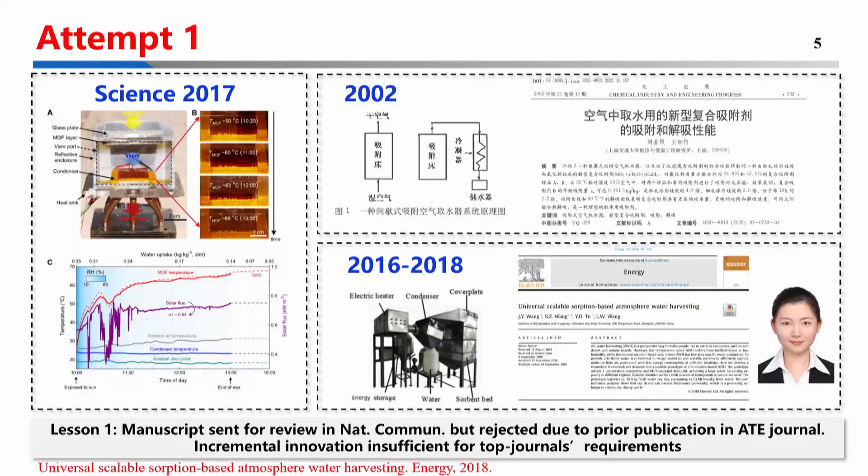At that time, we had a publication in China. But then later, a student, Jiayun Wang - she is here, now an associate professor - when she was a PhD student, she did the research work, and when the Science paper was published.

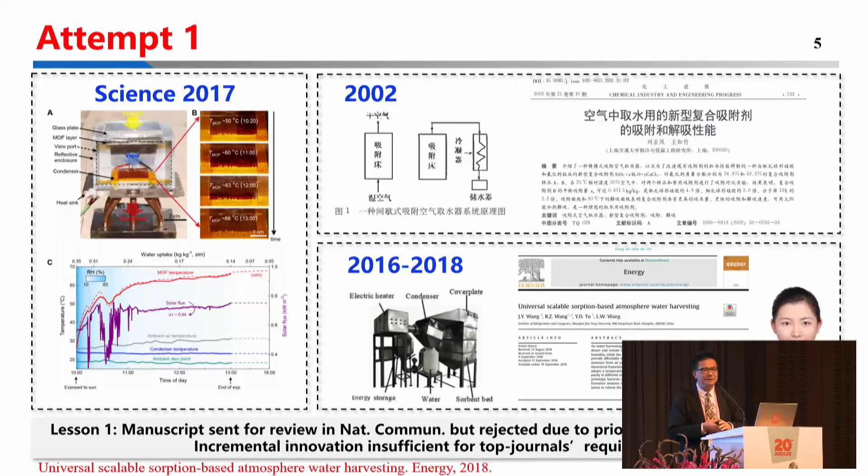At that time, in our laboratory, we had built a machine to get atmospheric water harvesting every day, 50 liters. This made our group think: why does 1 gram of water from MOF materials in a very dry area get published in Science, but we get 50 liters of water and can only publish in Applied Thermal Engineering or Energy? So we made some considerations.

Some years ago, we also had research work on air conditioning, whether it's possible to get latent heat and sensible heat separated. We created technology using desiccant materials coated on heat exchangers, using desiccant to absorb moisture for dehumidification. In this case, for air conditioning, electric drive is used for cooling, but dehumidification was done by the desiccant materials.

But with desiccant material, you need to consider regeneration - we used the condensing heat for regeneration. In this case, we could get the normal COP value for air conditioning increased by 100%. This had a great impact, but at that time, we were just beginning to try to seek the possibility to publish in high-impact journals. At that time, we had no experience.

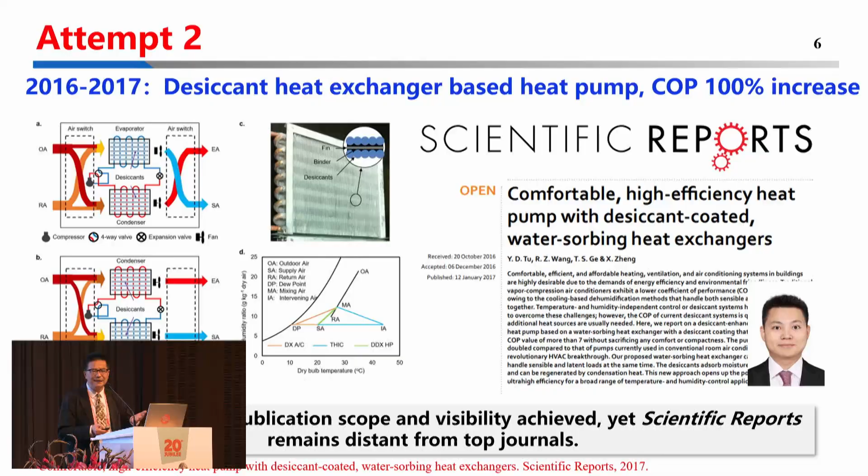We submitted to Nature, then transferred to Nature Communications, and finally to Scientific Reports. My student told me, Professor Wang, Scientific Reports is also a part of Nature. So in this case, I finally accepted, we submitted and went through the peer review process, and at last we paid $3,000 for the payment. This is an open access journal. It's actually a very good publication, but unfortunately, although we had very good results, it's not a high-ranking journal. But we had another attempt.

Due to this experience, when a cell-based journal called Joule was launched, in its second year, because of the impact of atmospheric water harvesting in the world, I contacted the editor-in-chief of this journal, Philip Earis, about whether they would be interested if we contributed a review article. My proposal was accepted by them, and then three students worked with me to prepare the review paper for Joule. It was published in August 2018. This was the first time I felt we had contact with a high-impact journal.

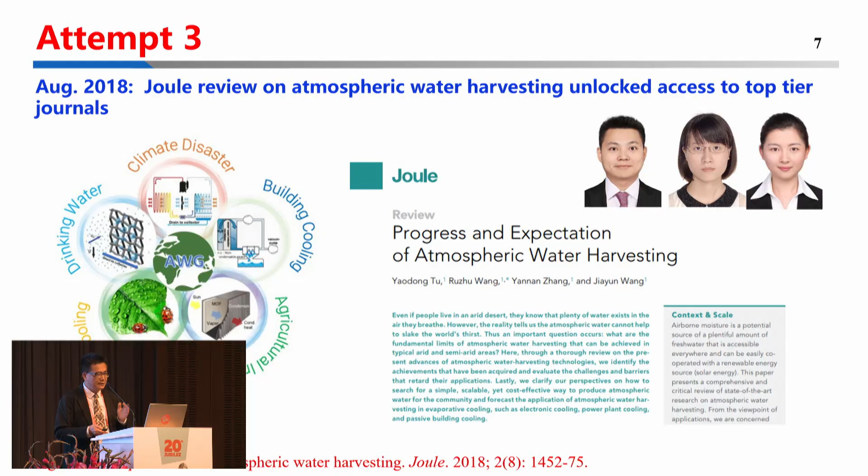At that time, the impact factor wasn't ready yet, but I thought this was a good journal. This helped our research and also encouraged our students. This is why I wanted to found a so-called innovative team on energy, water, and air, because our team works with solar energy, air conditioning and heat pumps, and also desalination. Energy, water, and air are the main criteria of my research group.

At that time, I set the goal that every year our small group needed to publish 3 to 5 high-impact journal papers, minimum Nature Communications level or even higher. So we started the exploration, trying to explore ground-breaking basic research from 0 to 1. The first success was research published in 2019, also in Joule - our first completed research paper. Really, it took us 2 years.

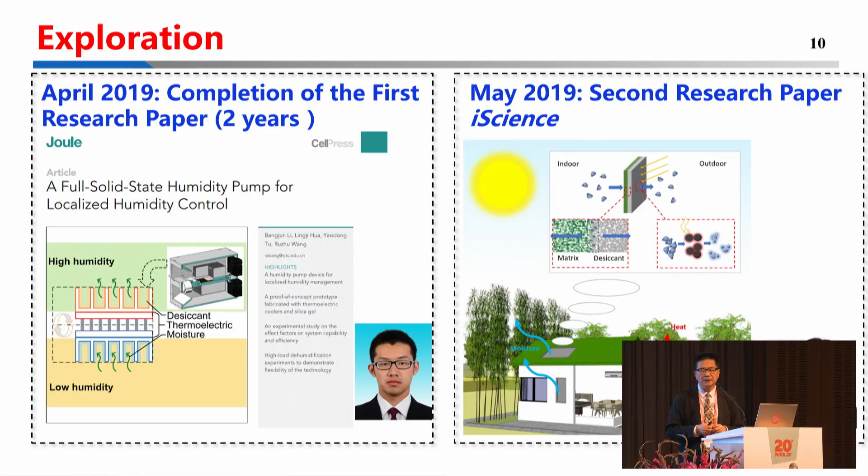Meanwhile, we had a second research paper, because at that time another new journal called iScience was launched. We published another paper on solar-generated dehumidification, where we took humidity from inside and moved it outside through an absorption panel. Outside, we had a selective coating to absorb solar energy and release the humidity - again, a kind of humidity pump concept.

There is also a very important conference, the ASME International Conference of Micro Nanoscale Heat and Mass Transfer. The conference organizer invited me several times to deliver a keynote lecture, but originally I never participated in this kind of conference because I think I'm not doing nanoscale work. I'm doing scale-up systems.

But after half a year, they contacted me again. They said, Professor Wang, you are doing adsorption refrigeration, you are using adsorbents, and adsorbents should be nanoscale. Why not? If we need somebody to say this, who will be most suitable? So finally, I thought if you want me to say something about adsorption refrigeration, that's my research area. I agreed, but for the conference topic, I set it as adsorbents relative to energy, water, and air.

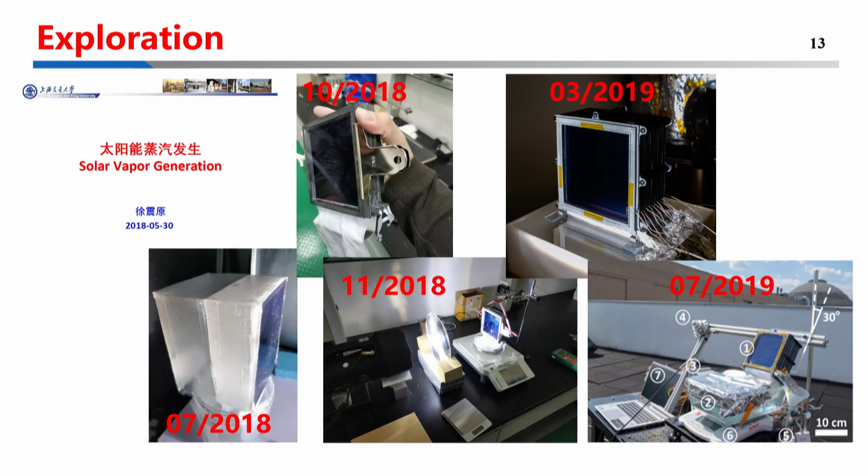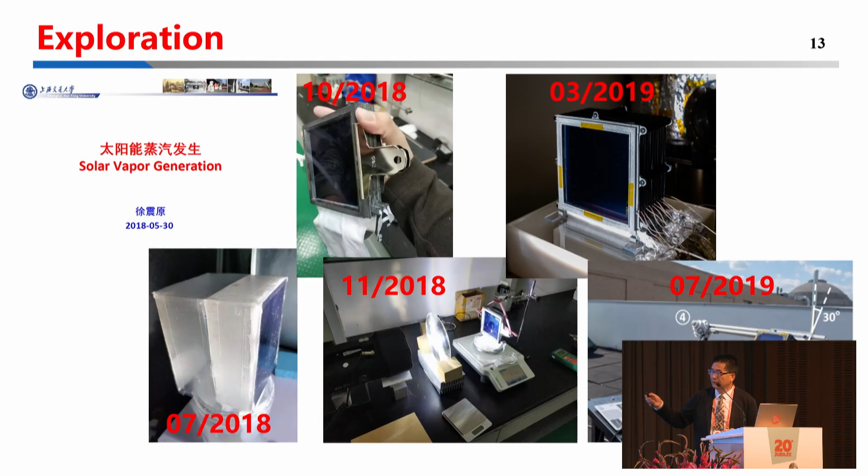This is also for desalination. Professor Xu Zhenyuan, at that time a young faculty member, is also here today. We developed a lot of research work on solar desalination. Starting from 2018, and finally in 2019 after one year, everything finished, and we sent our facility to MIT, because we had some collaboration to be tested there. This helped us because this research is more well respected since it's from MIT. We collaborated with MIT, and finally got good publications in Energy and Environmental Science.

Meanwhile, we tried some research for breakthroughs in advanced materials. We did research work on PCM materials for thermal storage. In this case, thermal conductivity is very critical, so there are a lot of researches for enhancement of thermal conductivity of PCM materials, such as nanofibers and so on. But for us, if we consider building scale-up systems, we must use engineering materials.

In this case, we tried expanded graphite, because expanded graphite could be made into a plate and also scaled up. We could integrate this with PCM materials and then form it into a fixed form. In this case, we could increase the thermal conductivity nearly 70 times compared with PCM.

Finally, this paper was published in Advanced Materials. We collaborated with the second last author, a very famous professor at Shanghai Jiaotong from the School of Materials. He instructed us a lot on how to get a publication in material science. This is actually a very good story.

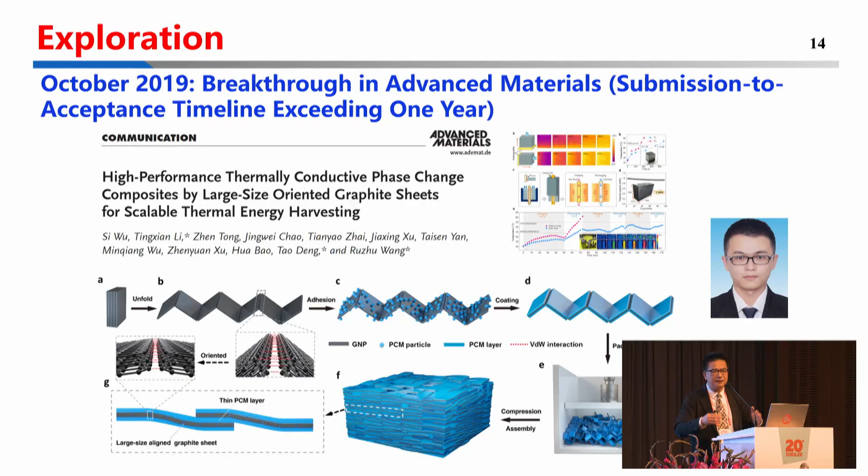We succeeded with Joule and with Advanced Materials, and this made the whole group, especially the young students, inspired. The inspiration is very, very important. When this happened, I saw that before 8 o'clock, when I arrived at my laboratory, students were already doing experiments. This just made the whole research group very inspired and active.

Then, in the spring of 2020, we had publications: another one in Joule, and Energy Storage Materials, then in February, Energy and Environmental Science and Angewandte Chemie, then in March, Energy Storage Materials, and later ACS Materials. These were several papers from students. At that time, on Shanghai Jiaotong University's homepage, there were 5 papers listed, and 4 of them were from our research group.

Due to COVID-19, scientists were nearly isolated, but at that time in China we were free to move. In the United States, however, it was not possible for scientists to come to the laboratory. But MIT organized an international curriculum on thermal innovations, suggested by Professor Gang Chen and also Professor Evelyn Wang at MIT, the department head of mechanical engineering. Professor Evelyn Wang called me and told me we needed a specific topic for water harvesting, and asked who should be the lead candidate to organize this kind of workshop. I suggested this group, and then we broadcast online for this kind of seminar. MIT made the promotion for all speakers.

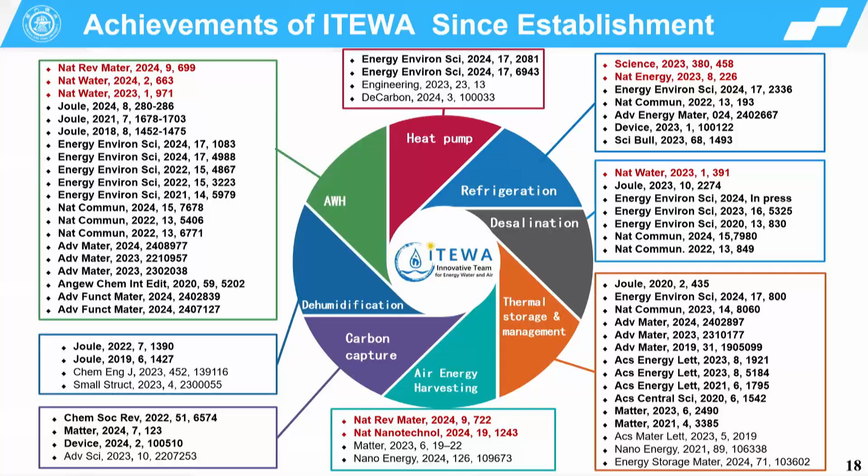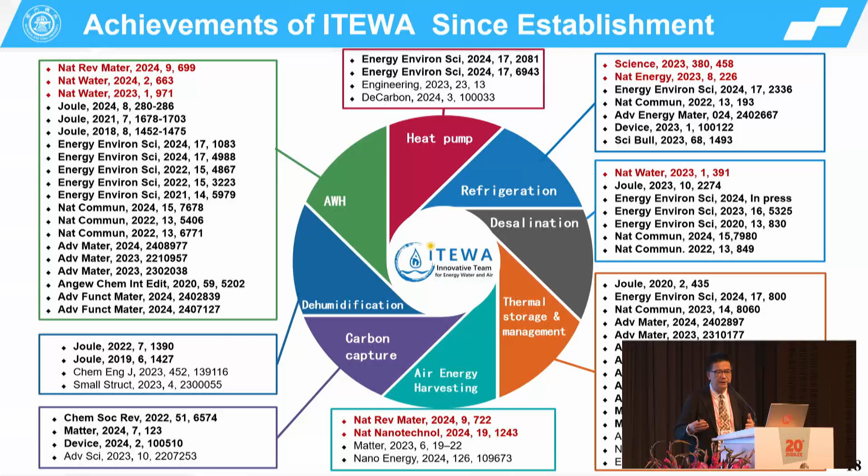After several years, by the end of 2024, we had all these publications—something we originally couldn't imagine, because my target was 3 to 5 high-impact journals every year. Now we've had publications in Nature Reviews Materials, Nature Water, Joule, Energy Environment Science, Nature Communications, Advanced Materials, and so on. This represents the whole group—we have 4 faculty members and nearly 20 students involved, which has inspired a lot of new achievements for the whole research group.

Now let me talk about what we've done from 0 to 1 and 1 to 100. Our research focus for the team normally covers atmospheric water harvesting, thermal management for electronics, dehumidification and humidity control, energy storage, greenhouses for plants, heat pumps and energy storage, and desalination. I'll just give some examples, starting with atmospheric water harvesting.

At the start, we had publications in Applied Thermal Engineering, then again Applied Thermal Engineering, then Energy. We went through several steps, starting from materials like ACF, graphite, and silica gel. In 2015, we got 0.3 kilogram of water per day with solar energy. Then in 2016, 14.5 kilograms of water per day, and in 2017, 50 liters. We got a project to develop a unit producing more than 30 liters of water per day driven by solar energy—these are the steps we went through.

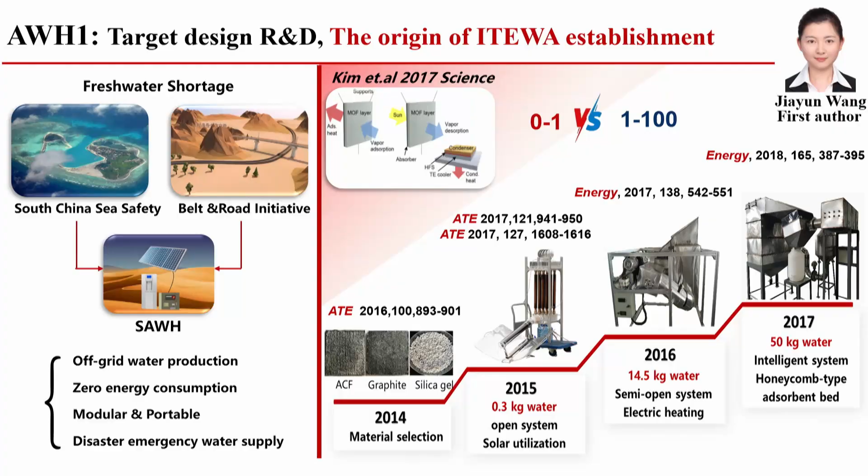We also did some research work with MOF materials, based upon experience from MIT, UC Berkeley, and other research groups. Even with MOF materials for absorbing water, there's a limited adsorption capacity because it's physical adsorption. So we also worked a lot with chemical adsorption, using lithium chloride and impregnating lithium chloride water into the micropores of the MOF materials. This improved the adsorption of moisture much compared to the regular ones.

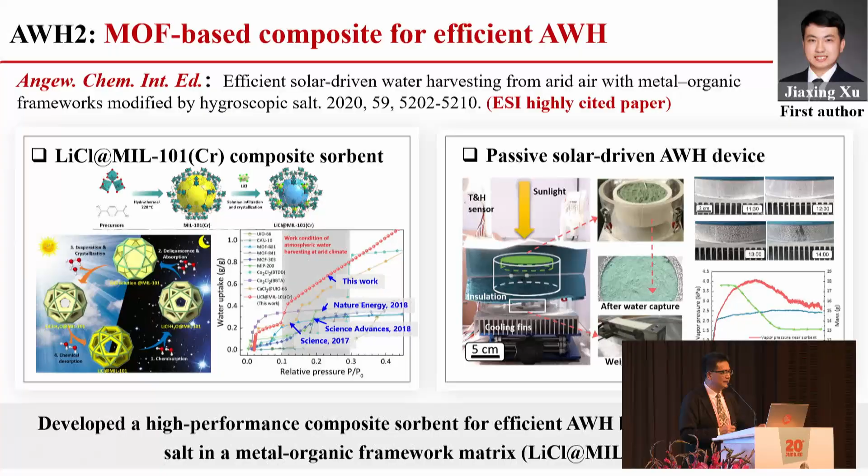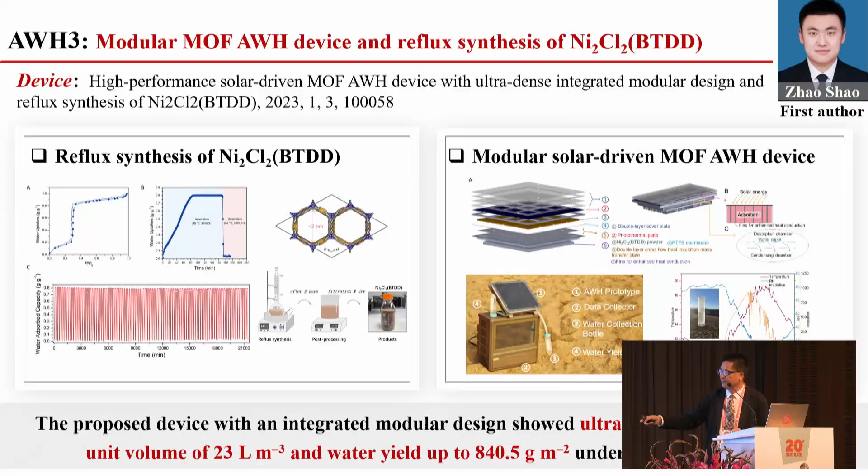Based on this, we developed a passive solar-driven atmospheric water harvesting system, which was published in Angewandte Chemie International Edition. We also used solar energy directly with a solar collector, integrating solar panels with a condenser on the backside. During the night we open it for adsorption, and during the day we seal and close it, letting solar radiation hit it so we could collect liquid water condensed from the condenser. With this, per square meter we could get nearly 800 grams of water, and the size is very compact.

Later we thought it could be possible to use solar energy for continuous daily operation, which requires an adsorbent with high-speed adsorption and high-speed regeneration. So we used lithium chloride on a nano-composite adsorbent, along with specific techniques to improve heat and mass transfer. In the end, we established solar-driven rapid cycling atmospheric water harvesting devices, able to operate about 8 cycles per day, making efficient use of solar energy. This results in about 2.3 liters of water per square meter per day.

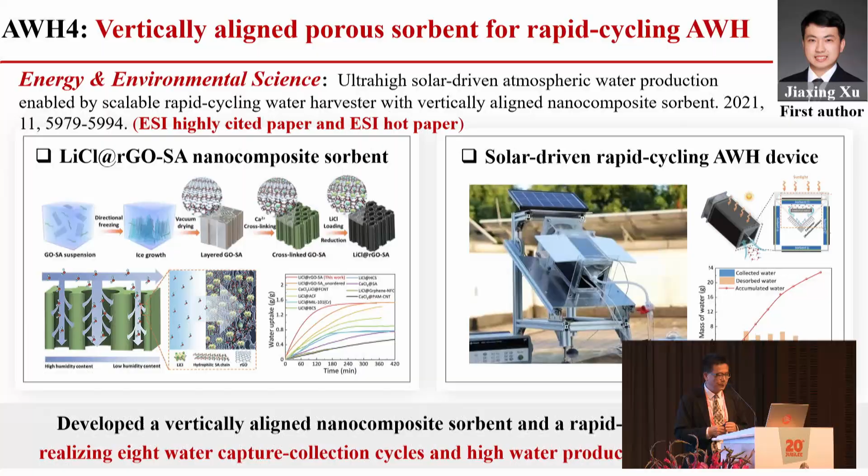Also, we tested another result in the same arid region in the desert area. What we found is that in that area, adsorption usually happens very slowly, so we put adsorption materials out at night to absorb moisture from the air, then used daytime for regeneration. But we need a very short time for regeneration.

So in this case, I suggest we get maybe 8 units of this kind of adsorbent. Then during the day, each unit could generate 8 times, so in this case we could get a much higher yield of atmospheric water harvesting.

This paper was published in Nature Communications. Later, I had visits from a company, and they wanted to commercialize it. Later I will show you — now we have a commercialization for atmospheric water harvesting.

Also, the students learned how to do this using MOF materials. We explored whether it's possible to make a rotation every day with 3 plates, making it continuous adsorption and desorption. This actually achieved about 2.11 liters of water per kilogram per day.

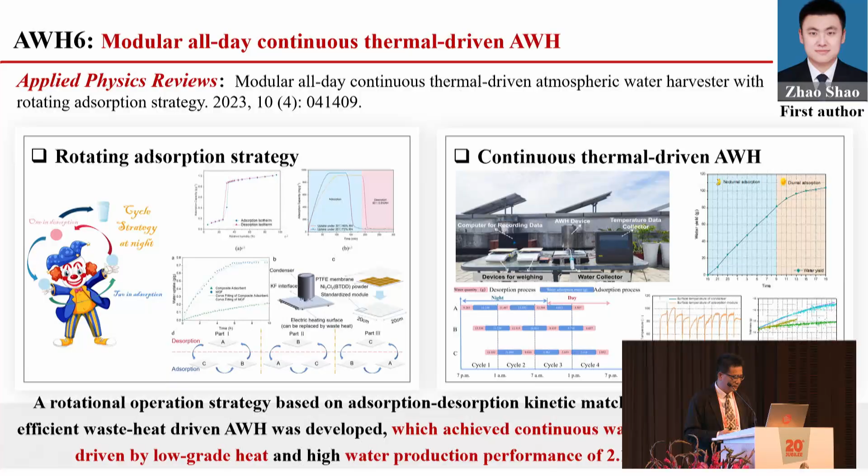We are also working with interconnected porous gel for high efficiency, continuous solar atmospheric water harvesting.

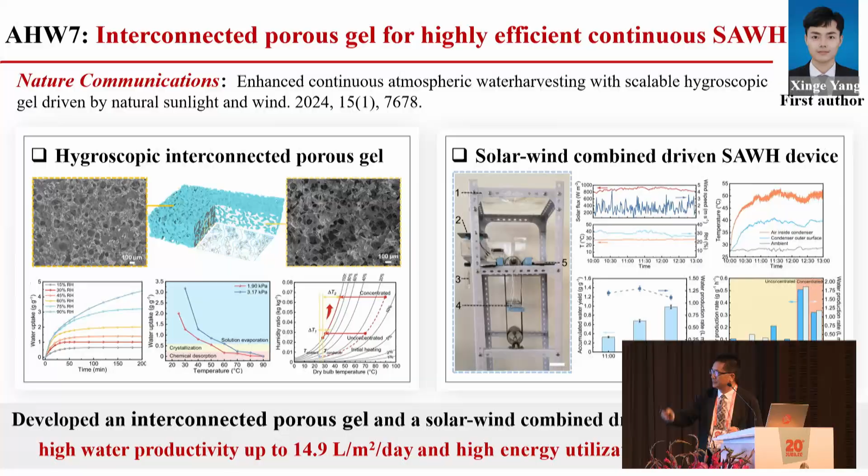This is a specific machine — we take the material and just rotate it. When it's outside, you get adsorption. But when it comes to the concentrated solar, you get regeneration, and in this case you get moisture condensed into water.

So in this case, what we achieved was nearly 15 liters of water per square meter per day. This is a very big increase, making this kind of technology market available and market interesting.

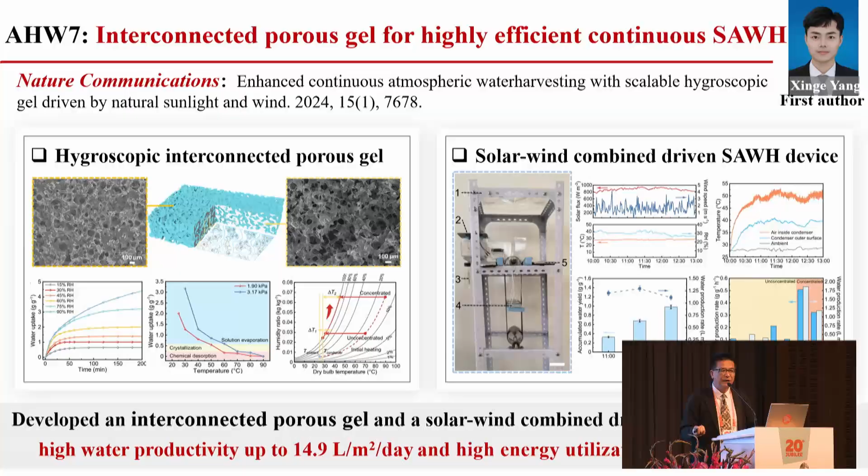The second topic for the research is electronic thermal control.

Some years ago, before I considered doing this, with this kind of MOF material I considered application for mobile phones. We used a near-standard mobile phone for testing. When the electronic working load is lower, if it's coated with MOF material, it could absorb moisture. But when the load goes higher and the temperature rises, the absorbed moisture is released, and in this case you reduce the temperature.

So this is a kind of what we call sweat cooling, because it's similar to how the human body cools through sweat. For the mobile phone case, we demonstrated that the maximum temperature could drop by nearly 8.6 degrees Celsius.

This verifies that it's very efficient, because for the adsorbent materials with moisture, the desorption heat is normally nearly 2,000 joules per gram — compared with PCM, nearly a 7 to 10 times increase. So in this case, using just about 1 gram, you get the electronics' temperature well controlled.

Students also practiced with battery thermal management, coating it with MOF material. Testing found that we could control the battery temperature below 45 degrees and realize self-preheating, increasing the battery capacity by 9.2%.

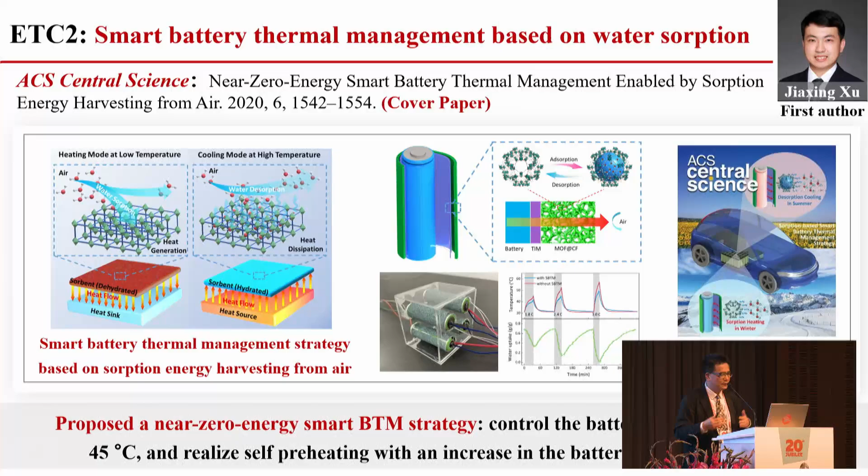So in the summer, it cools down, but in the winter it heats up by adsorption — cooling down happens by desorption. We tested such batteries and demonstrated that it keeps them always working in a safe temperature region.

Based upon this, we also tried — because my research group had very good collaboration with Huawei for 5G stations — originally we optimized our 5G stations, because going from 4G to 5G, Huawei wanted to keep the size unchanged. They asked us to optimize the heat exchanger. It was successful — nearly 10 million units used our structure. So we had a very good partnership with Huawei.

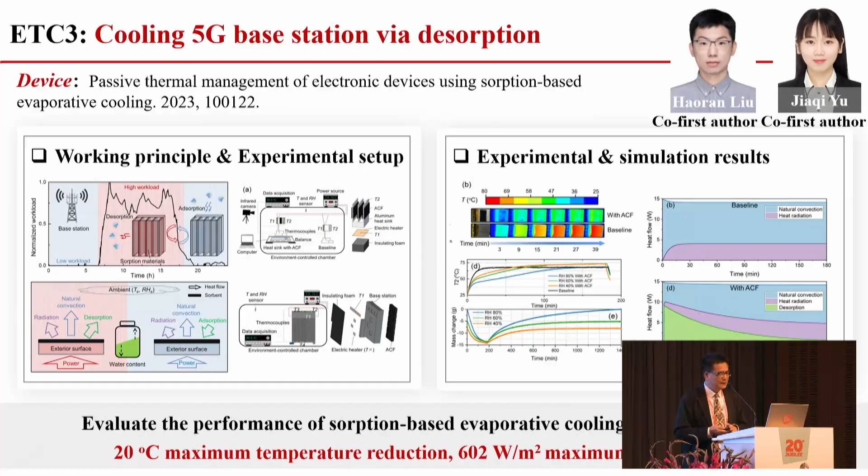So in this case, I am considering how to use this for 6G. I suggested using this kind of sweat cooling coated on the heat exchangers. What we found for the 5G station we tested was nearly 20 degrees maximum temperature reduction, with a cooling power of nearly 600 watts per square meter. This could be a very important development.

So finally, we had passive thermal management of electronic devices. This is just a review article published in Device, where we introduce how this could function. We consider its use for mobile phones, 5G stations, and any kind of batteries, including for battery charging and so on.

Very recently my students thought we could also do PV cooling, because of photovoltaics in China we have huge photovoltaic power stations, especially in the desert area. After long use there are a lot of dusts, but usually no water there, so they have a requirement to use water for cleaning. So in this case, we tried the possibility to use sweat cooling to cool down the PV photovoltaics.

In this case, you could increase the energy efficiency to generate electricity, but meanwhile we could produce water. So this is a concept for this research, an example of using future energy. This was published in Joule, and now we are doing the real one, cooling down photovoltaics while also producing water.

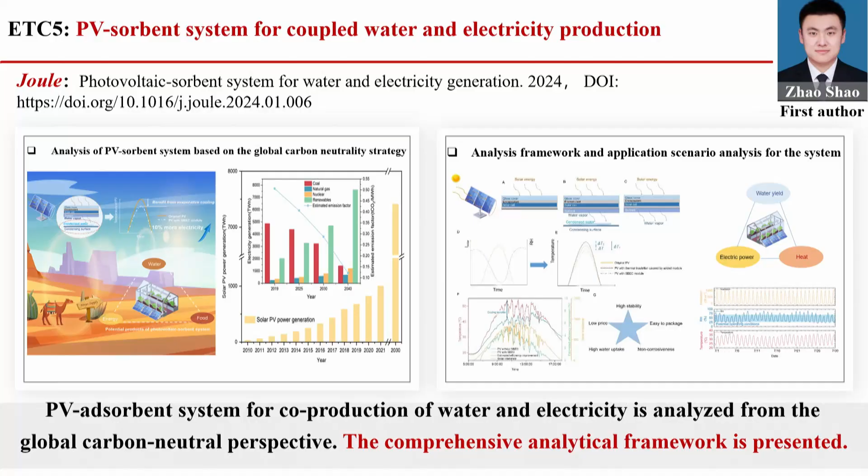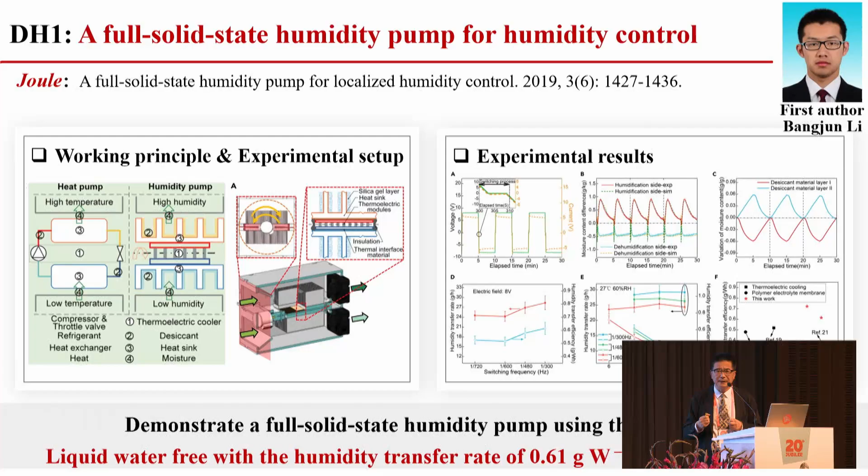So the third topic is dehumidification and humidity control. We started from this student, Bangjun. At that time he was a PhD student working on 5G mobile phone cooling for Huawei, but this topic was not related to his PhD work, he was just interested in it. Very fortunately, he got his first research publication in Joule.

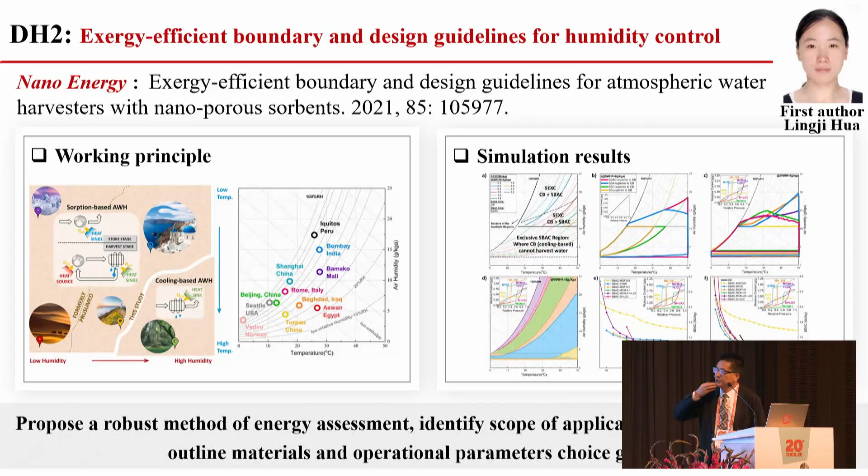Then another student, actually his wife—they were classmates and worked together, and she became his wife—worked on nano energy. We published one paper on exergy efficient boundary and design guidelines for atmospheric water harvesting. In this case we clarified, for AWH in different climate regions, what the boundary conditions are.

And also, this is a postdoctor, Primož Poredoš. I think some of you may know his father, Poredoš, from the Slovenia Energy Association, he was chairman actually. So he became my postdoctor, and while working with me he contributed one paper in Science, one paper in Joule, and also one paper in Energy & Environmental Science.

So this was the idea, so-called sustainable cooling with water generation. The editor liked the idea, asking if it's possible to have these dual uses in dry areas. So we proposed a good idea for how to achieve this in dry areas for cooling and also atmospheric water harvesting.

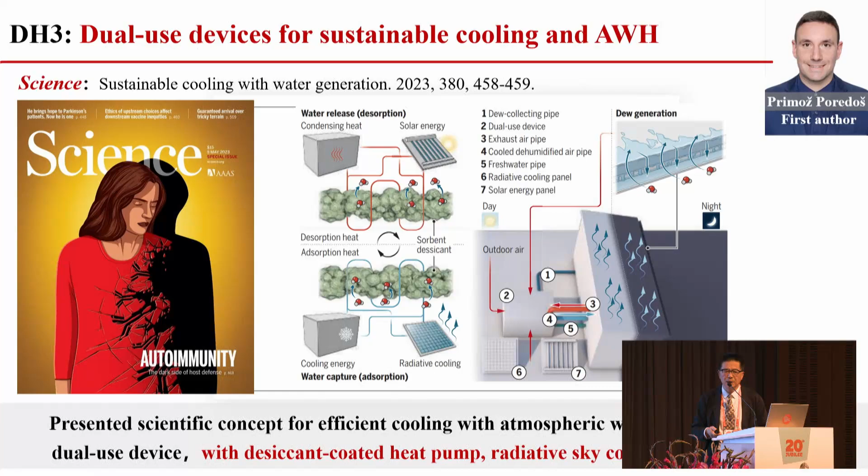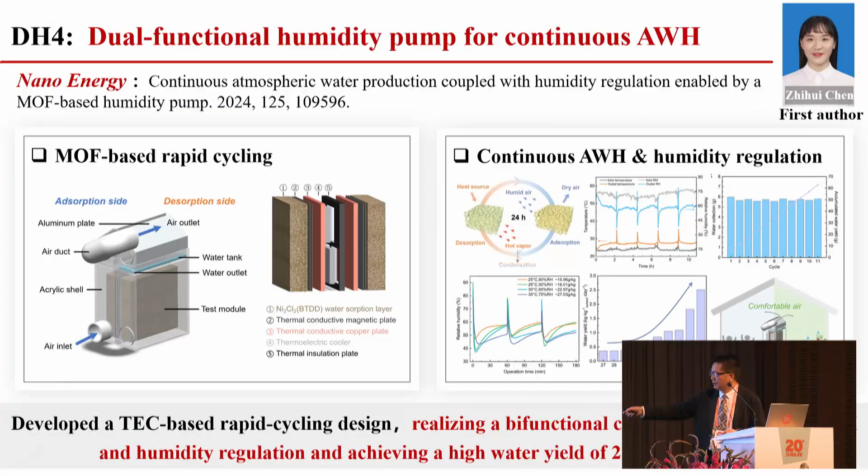Another student worked on using thermoelectric cooling coated with MOF materials. Originally we did this for the humidity pump, but it's also used for atmospheric water harvesting, trying to make a very compact unit for water harvesting. So 1 kilogram of material gets about 2.5 liters per day in this case.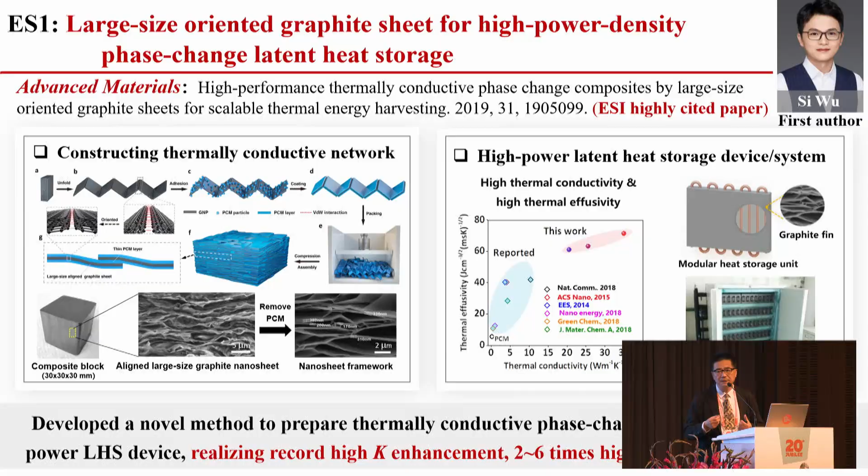This heat exchanger has no fins—we use expanded graphite as a fin because its thermal conductivity is very high. In this case it's very easy, and we could create a 1 kilowatt-hour system, and then scale it to a 15 kilowatt-hour system. We just connect it, so it's very easy to integrate, and we demonstrated this.

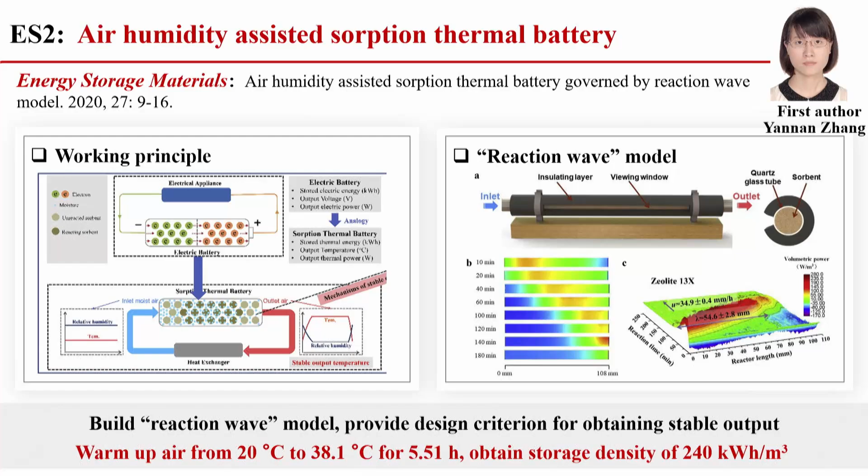We also did adsorption research. Adsorption of moisture generates adsorption heat, so in this case air temperature will increase. We considered whether we could use this as a thermal battery. But usually for a thermal battery, what we found is a so-called reaction wave, and we developed a model for this.

The most important thing is how to get a stabilized temperature output. If we have an inlet temperature of 20 degrees, heated to about 38 or 40 degrees, this is good for room heating. So in this case we need control of the output temperature and also control of the output power. We developed the model, demonstrated it, and succeeded, achieving 240 kilowatt-hours in 1 cubic meter—a very high energy density for adsorption thermal storage.

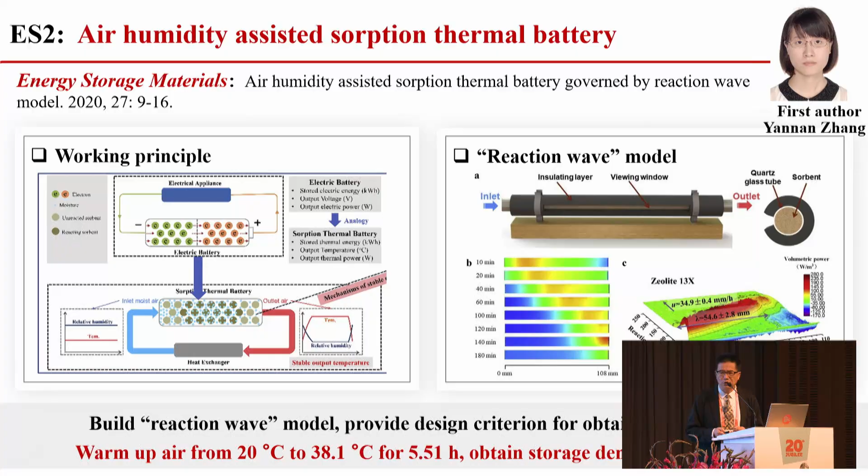Then I asked another student whether we could use this kind of technology for a thermal wall, for solar applications. A thermal wall is normally used during the day for room heating, but how do we use it at night? So in this case, we considered putting a honeycomb adsorption thermal battery into the wall.

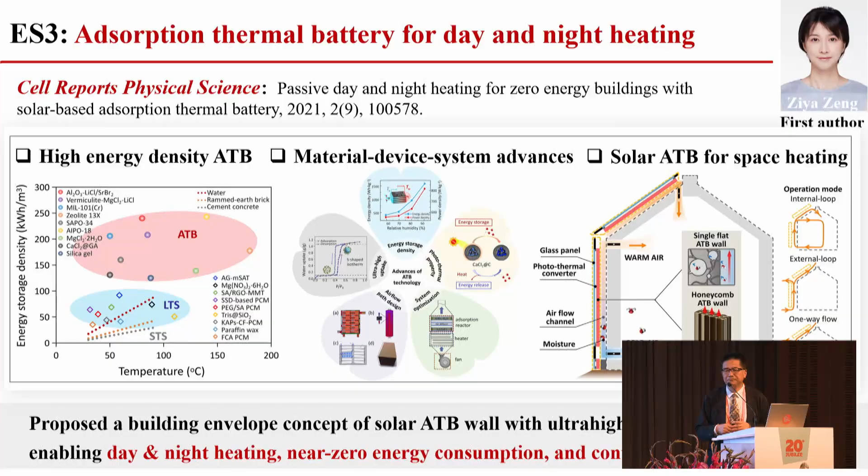During the day, you get regeneration of moisture, and heat also comes into the room. But during the night, we could get some humidity to come into the channel and then be adsorbed, and then heated air comes into the room.

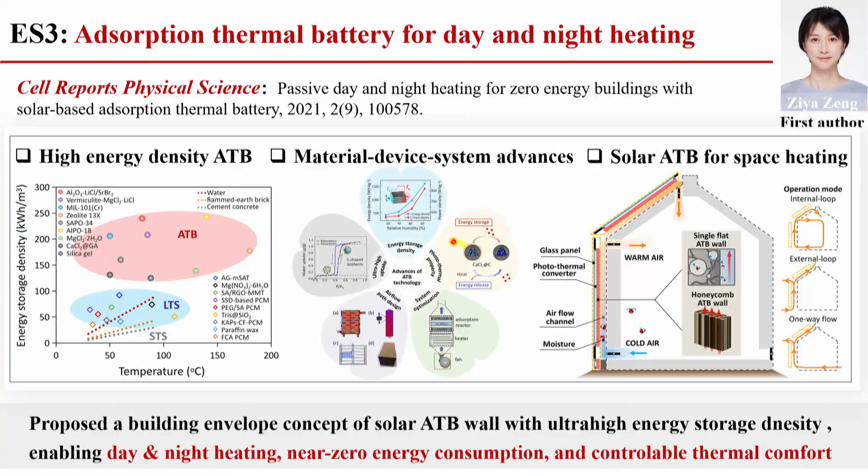So in this case, we could demonstrate for all-day usage, 24 hours, with effective heat delivery from low carbon building heating, and energy consumption reduction could be nearly about 54%. So we demonstrated the normal thermal wall and also the adsorption thermal battery wall, and we tested it.

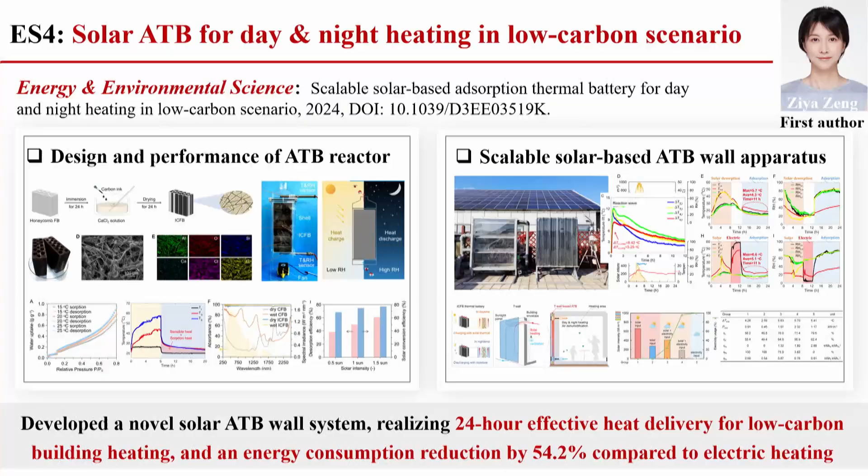So I think when the student is doing research, try to find a very good topic. This is just based upon my swimming. During my swimming time, I got one idea. When I finished, I immediately came to the student and said, this is your PhD work, I think it could be a good idea. Then I asked this student to do it, and she succeeded in this research.

And also another work, we're using atmospheric water harvesting with energy storage. So in this case, we used some hydrogel, and the hydrogel could get much higher water adsorption. And now this student also did a very, very successful job.

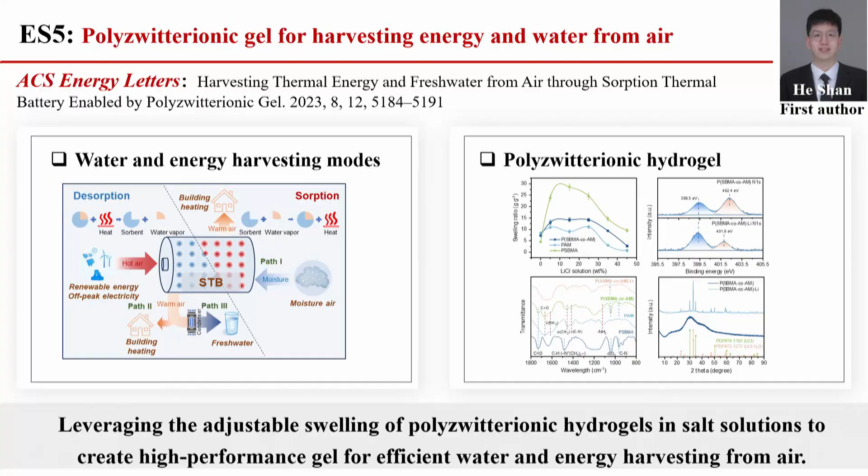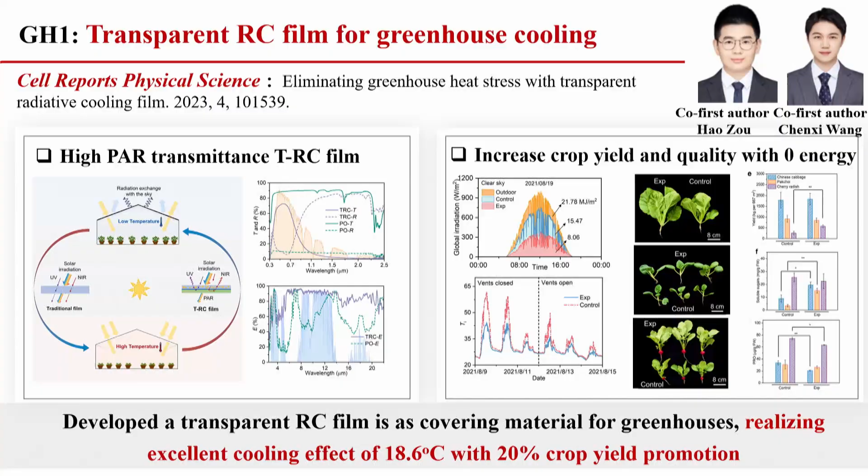Based upon this, because in the last years there has been a lot of interest in radiative cooling, during this process, in 2018 I applied for one project from the Shanghai municipal government for the greenhouse, because they needed greenhouse technologies. So in this case we used a solar radiation film for cooling, to get an excellent cooling effect, nearly about 18 degrees centigrade reduction for the greenhouse compared with a normal greenhouse. So we're sure that we could use this greenhouse even in summertime with temperature 35 degrees, and still produce plants inside. Also for the vegetables, compared with the control experiment, the original ones, we increased the quantity and quality.

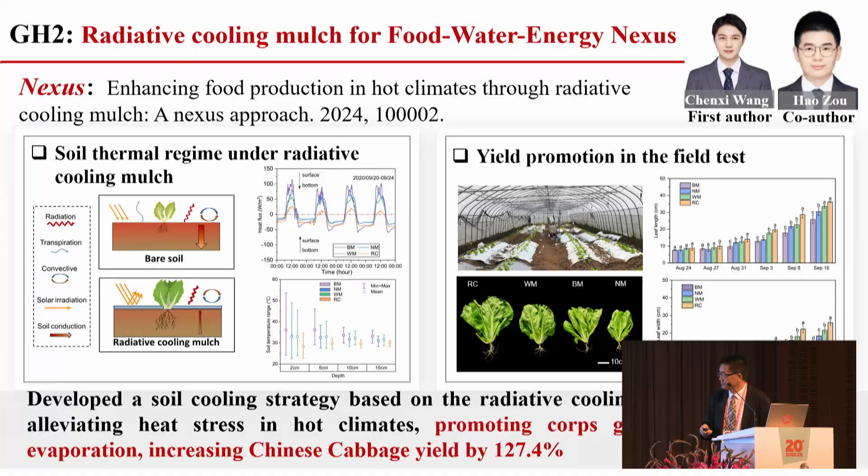Nexus is an open access journal, and also SDEWES. Professor Jerry Yan is the chief editor for this. So in this case we published our first research paper in Nexus, and now, in less than 2 years, it has about 30 citations, because this is a very good piece of research work.

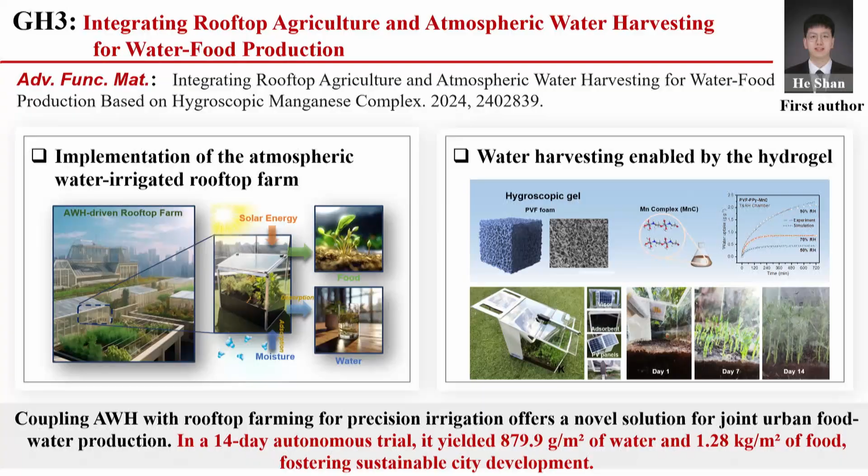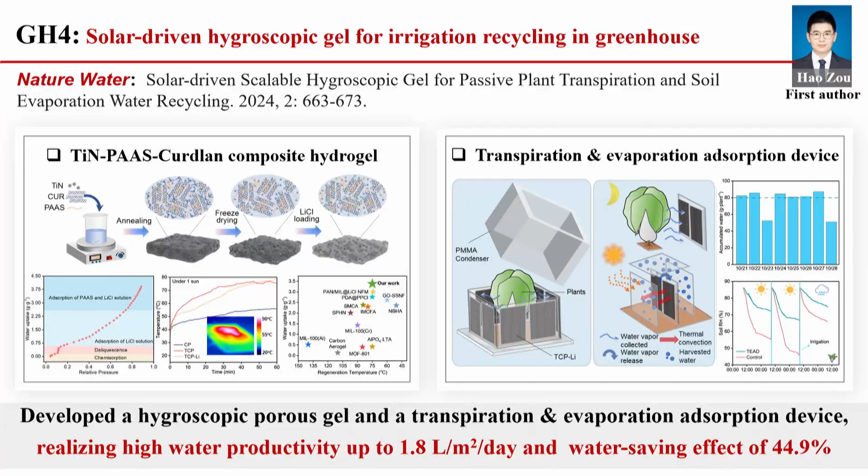Also for the greenhouses, we demonstrated, even in Singapore, that my students went to the rooftop because the humidity is high, to uptake water from air and use this water for the greenhouse for the growth of plants. We created a 1 square meter area, tested for about 2 weeks, and produced, per square meter, nearly about 880 grams of water, and 1.28 kilogram of vegetables. This just shows the example, and another example we published in Nature Water by another student, using a highly hygroscopic gel for passive plant transpiration and soil evaporation water recycling, which got water saving for greenhouses of nearly about 45%.

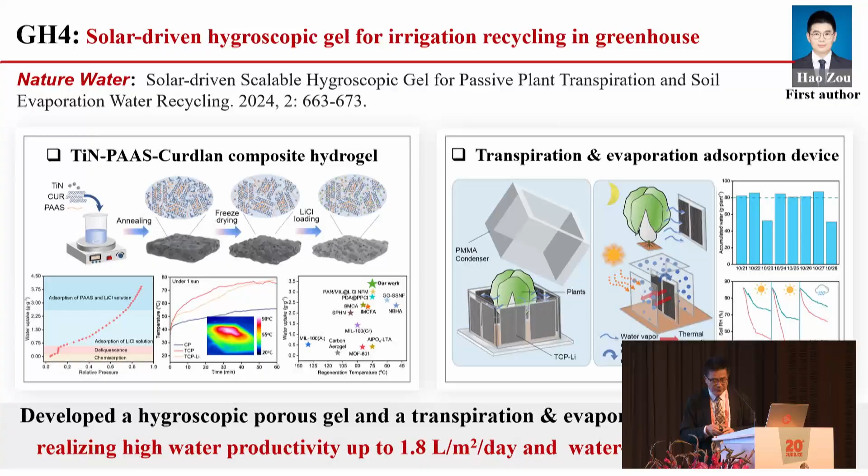So then we had some research with heat pumps. This is our conventional area. Other students published work, and then the heat pump students said, Professor Wang, we also need high impact publications. But I said normally it's not possible because heat pump is a very, very mature area. But we tried our best. First, we developed a water vapor high temperature heat pump utilizing industrial waste heat, and we found water is a good substance for heating temperature output over 100 degrees centigrade. It's a natural refrigerant, and also the efficiency is high.

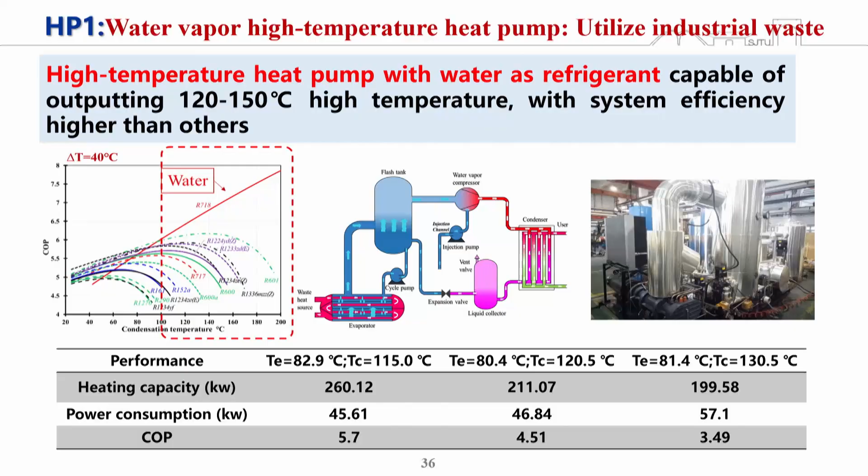So we built a system for waste heat recovery from 80 degrees to 120, 130 degrees. If you upgrade nearly 50 degrees, you get a COP value of 3.5. For 40 degrees, it's about 4.5. So we demonstrated this and also succeeded.

This was published in the 25th International Congress of Refrigeration in Montreal. And in a big competition, my student Woody, in the middle, got first place in the student competition. There were 3 students to receive the award.

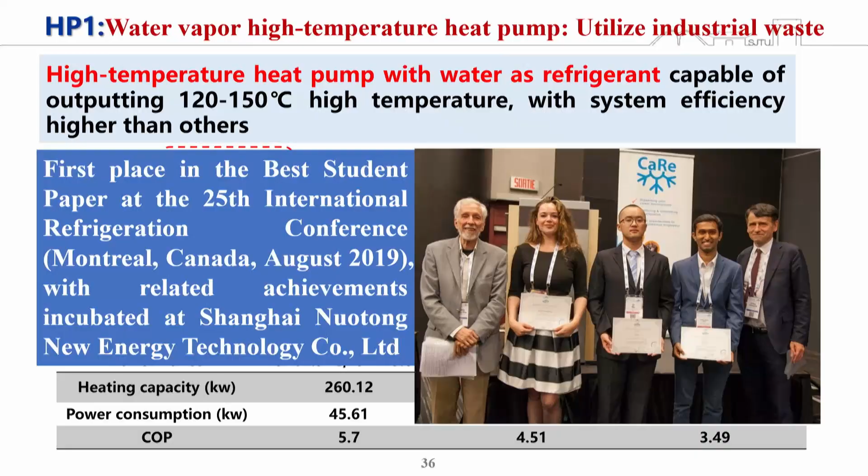Another example is the 26th International Congress of Refrigeration in 2023 in Paris. Another student, collaborating with my engineering PhD student, worked on a highly efficient desiccant-coated heat exchanger based heat pump to decarbonize rail transportation, based upon my solid desiccant dehumidification system, achieving a COP value 100% increased.

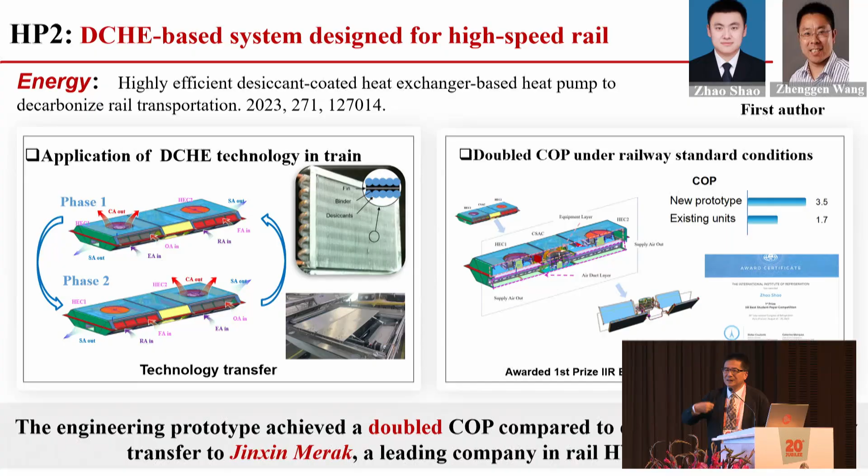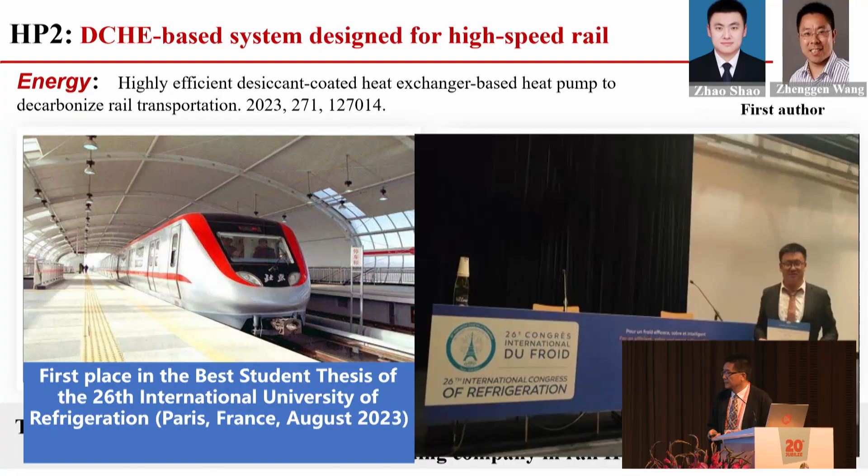We succeeded in demonstrating this, and this year it will start application on the Metro line in Shanghai. This student was also very happy to receive the first place award for best student thesis at the 26th International Congress of Refrigeration in Paris.

Then another student collaborated with NTNU, the Norwegian University of Science and Technology. He felt a strong desire to get a publication in high impact journals, so we tried many times.

At last we produced research on heat pumps as a sustainable bridge for global heating and cooling at a multi-scale level, because we considered not just a small scale, but the world scale, and how heat pumps contribute to decarbonization, not only for heating but also for cooling. This kind of topic could be very interesting for big journals.

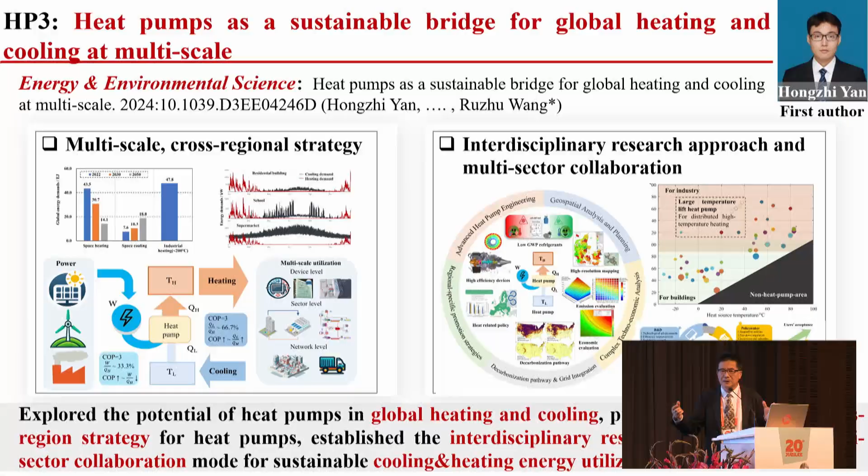We also did work integrating heat pumps with latent heat energy storage. We developed full models, sponsored by a major project from the National Natural Science Foundation of China, trying to integrate heat pump with thermal storage.

In this case, we could take industrial heat or heat from ambient air using a heat pump, then store it as latent heat, achieving nearly a 3 or 4 times increase.

With this, we could use another heat pump to further increase output for industrial heating demand, or use cascaded heating for normal uses. This gives us very great flexibility in the use of PCM materials.

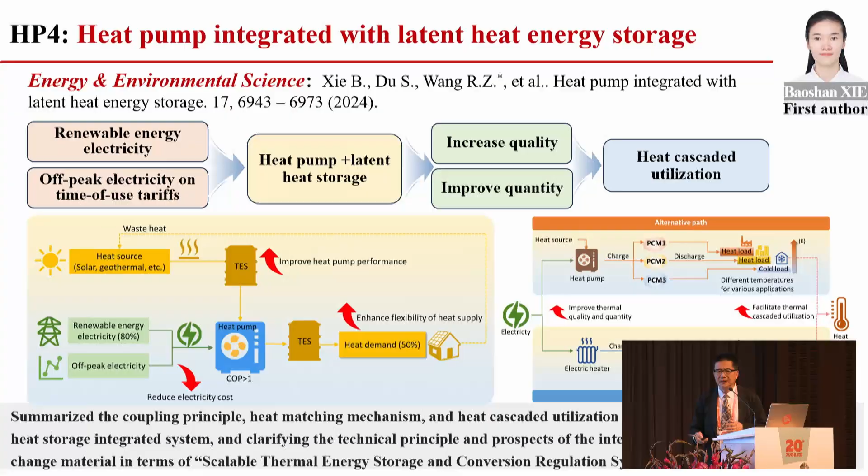We select high density, safe, and cheap materials, maybe around 60 degrees centigrade for example, so it will be easy for the market to accept.

We also ran tests for intermediate thermal storage, because some areas need winter heating and summer cooling. If you consider thermal storage, you need both heat storage and cold storage in summer, but that requires two separate tanks.

So finally, we considered an intermediate thermal storage at about 15 to 20 degrees, combined with a heat pump, to solve the needs during winter heating and summer cooling. This way, across the whole year of operation, we could achieve much higher efficiency.

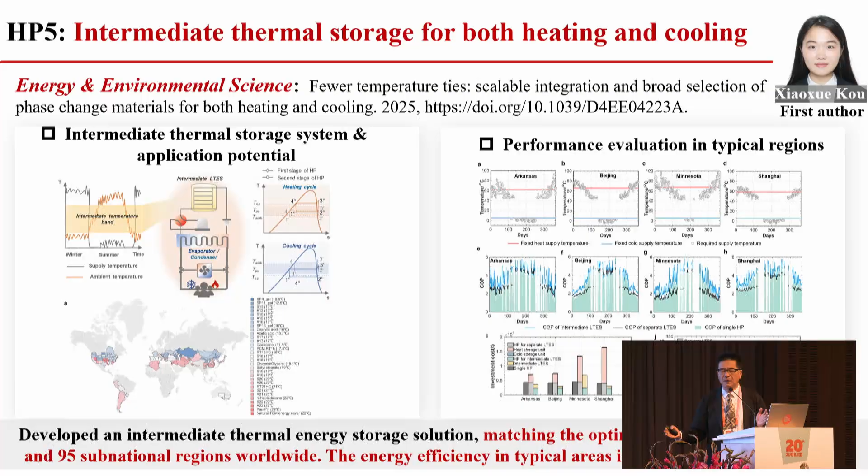We also tried integrating this with direct air capture. Direct air capture systems consider an adsorber and desorber, but the adsorption process needs cooling while the desorption process needs heating, so originally it was a separate system.

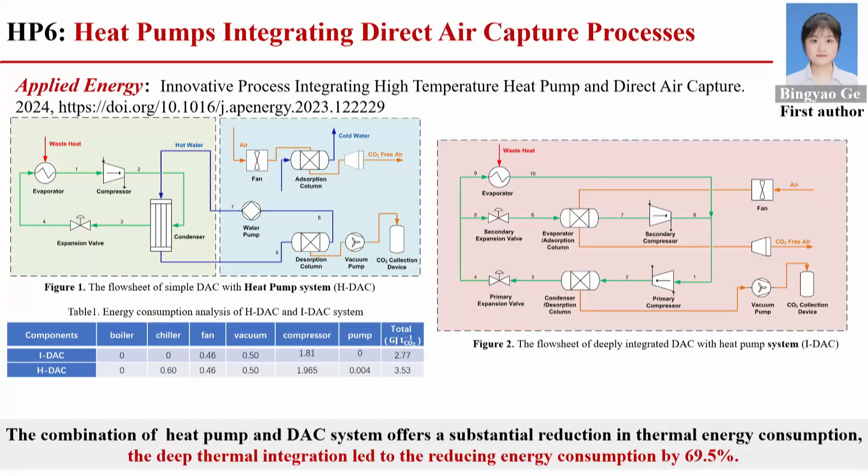Now we propose to use a heat pump for this. Professor Tianshu Ge, who is here, was responsible for this. It's a demo capturing nearly 600 tons of CO2 per year directly from the air.

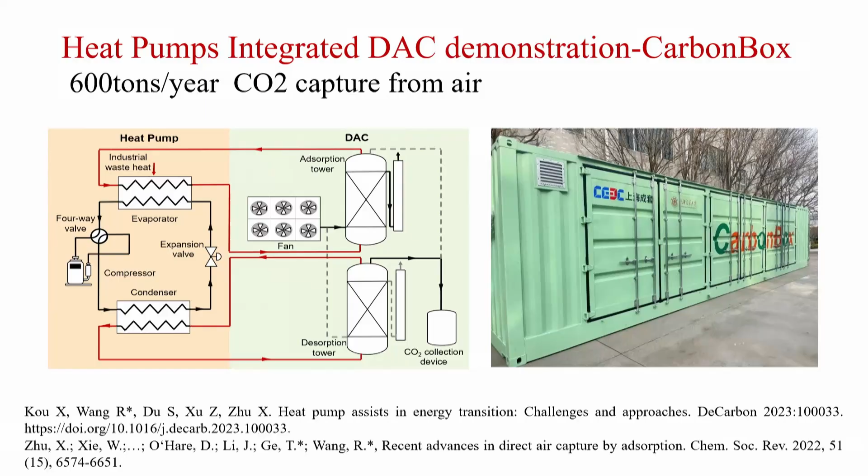This is actually the first demonstration where we could see we have the technology for negative CO2. I think next year we will have even bigger systems for demonstration.

So finally, let me say something about solar-based desalination. The first figure is from a collaboration we had, our first publication in EES, in collaboration with MIT, which was also selected as a top MIT research stories in 2020. We used thermal localized multi-stage solar still, generating a solar GOR of nearly 385%, because solar energy could be used across multiple layers and multiple stages.

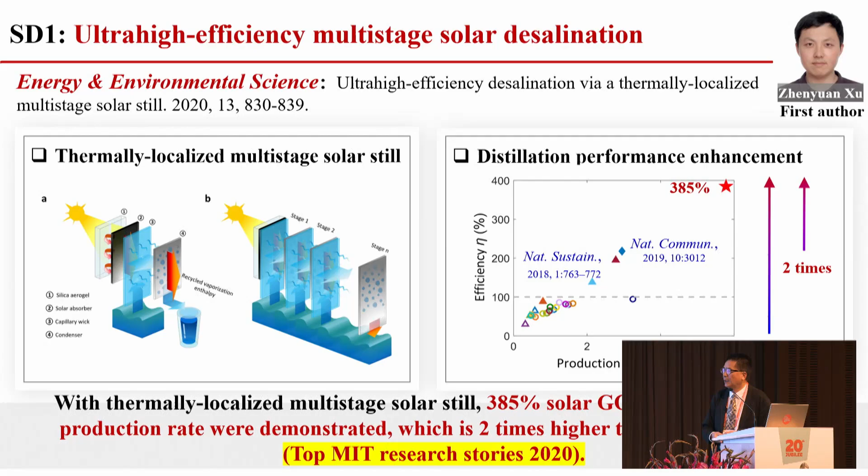Also, per square meter per hour, you could create 5.78 liters of fresh water. So this is really high productivity.

After that research, we also consider the uses of extreme salt-resisting multi-stage solar desalination with thermohaline convection. Because in the original ones, we use some capillary effect to get the water from the sea and then heat it with solar. In this case, you create some salt crystal, and then you have the problem.

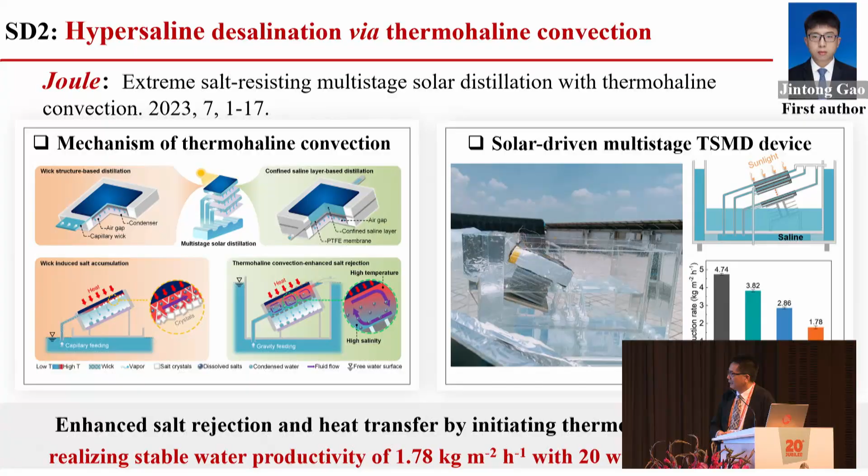But later we had a new concept for thermohaline convection. In this case, we could get continuously flowing water using gravity in this kind of feeding process. With this, even with salinity at 20%, we could achieve 1.8 kilograms per square meter per hour.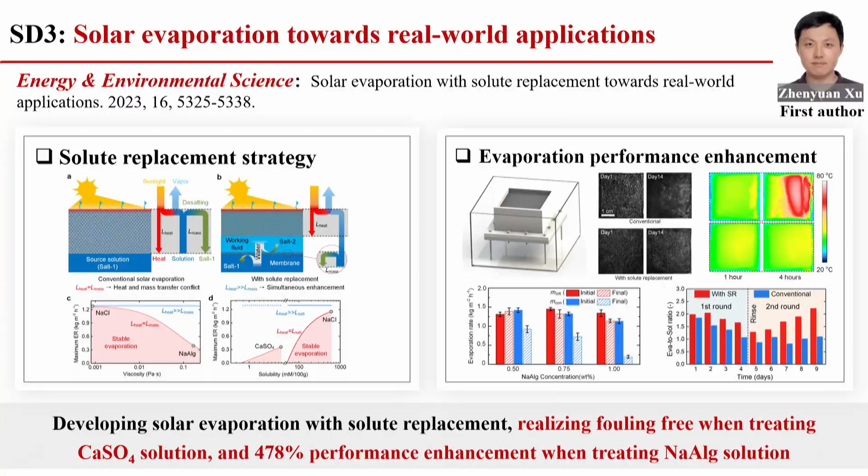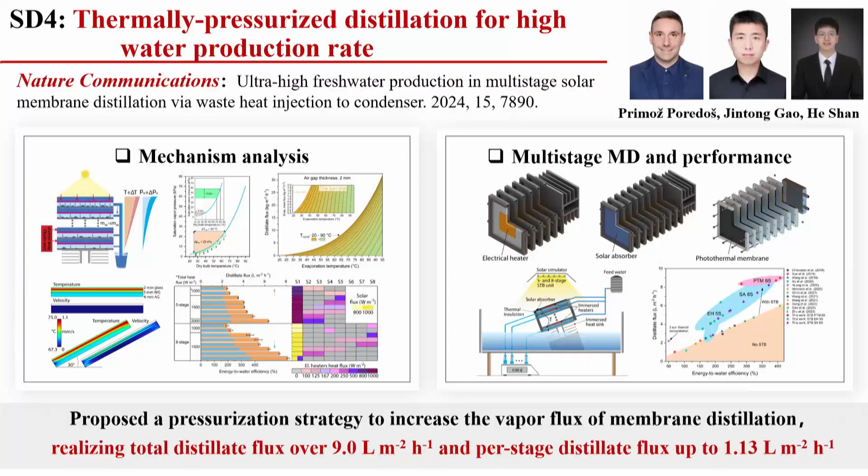And then also other papers on solar evaporation with solute replacement toward real-world applications. We could create a real system to get fresh water very, very cheaply. We also demonstrated multi-stage MD solar desalination to get 9 liters per square meter per hour. So that's our research from 0, 1, and 1 to 100.

So this research, we have some results. When the results were published, we got a lot of news that made every researcher very, very happy, because even the Chinese central government published the news for our research because it was from abroad. And they said, oh, Chinese scientists did this work, and they published it in central government news.

And also we got a lot of the Best Paper Award from SDEWES for China every year. And this is for the 20 years anniversary of SDEWES, and we filled the table. Finally, we had a lot of high impact publications.

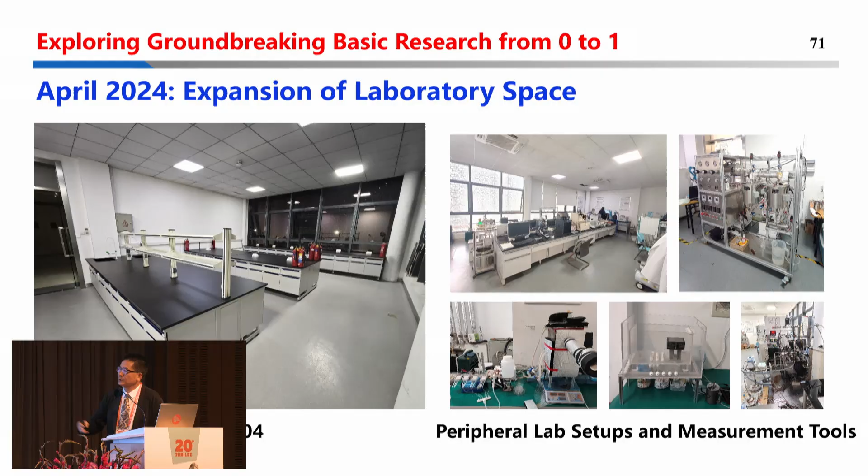And also the laboratory is much better, with more publications, and we selected there. And also we expanded the laboratory for more possibilities, in this case, to attract more fantastic researchers.

But meanwhile, we did atmospheric water commercialization. We founded a company called AtmosWell, because it's atmospheric water harvesting - where is water, to get water? So it's sponsored by General Electric Water. They got 51%, our team 49%.

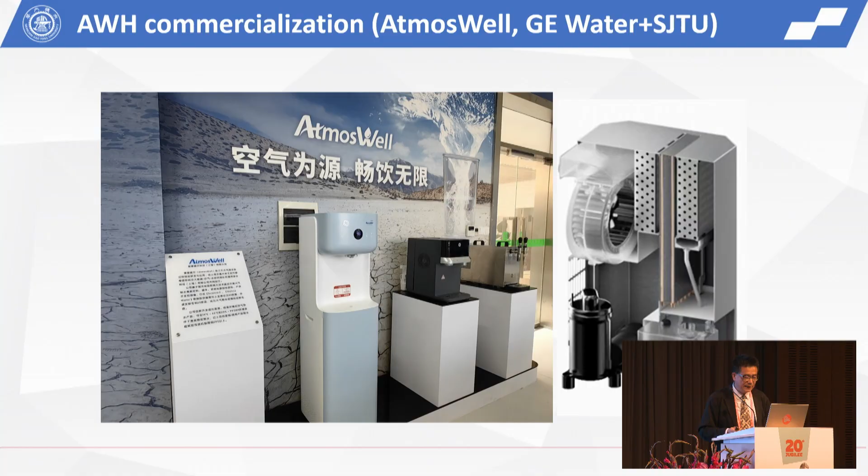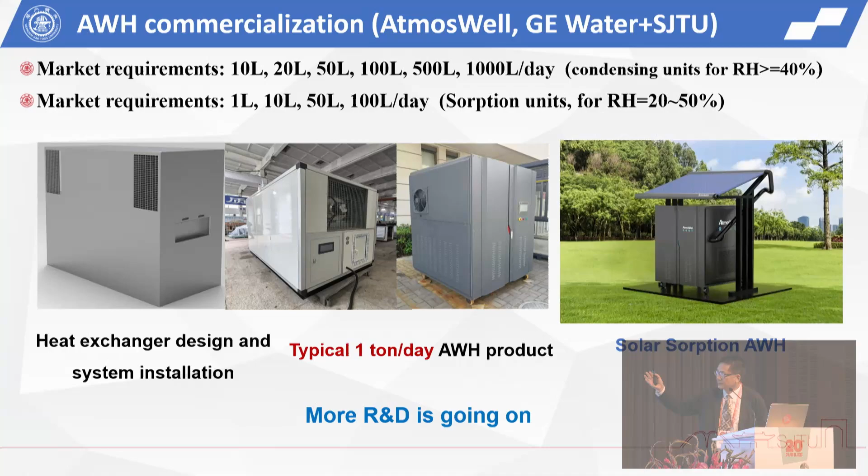In this case, now we have a demonstrator called Itawa Park. So this park, because we had a lot of units of this kind of prototype, is now on the way to commercialization. So this is actually the commercialized product, not only for the room side, but also outdoor units.

And meanwhile, we published one paper, a commentary for Joule, because we contributed the review and also the perspective. And now I think it's time to give a commentary on approaching thermal boundaries and how to solve the problem of atmospheric water harvesting.

So in this case, I would like to show you a very short video of this Itawa Park, and we try to demonstrate what kind of things are there.

Itawa Park, a zero energy park. Here I could show you innovative research on the energy, water, air, and food nexus. This is a green energy laboratory sponsored by the Italian government, called the Italian Green Energy Laboratory in Shanghai Jiao Tong University, which is equipped with about 60 kilowatts of photovoltaics. We already connected this to an electrical battery power station.

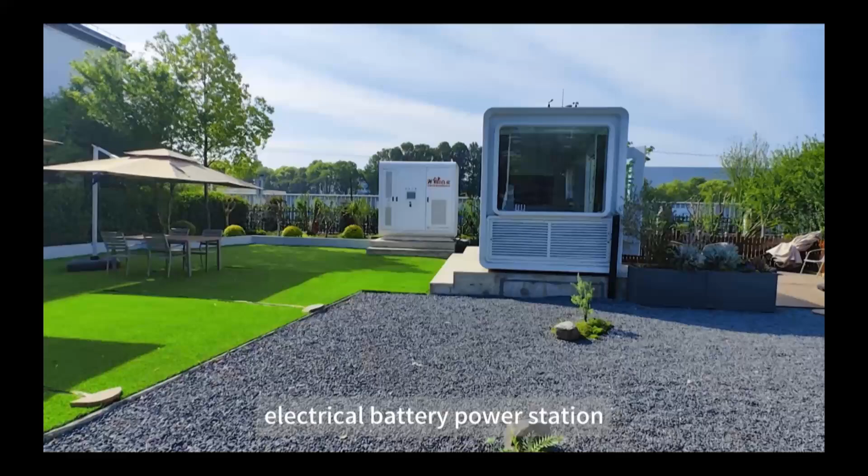Here you see this is a 256 kilowatt-hour battery, which is used to store the energy from the photovoltaics of the green energy laboratory. In this case, we could make this green energy laboratory an off-grid building.

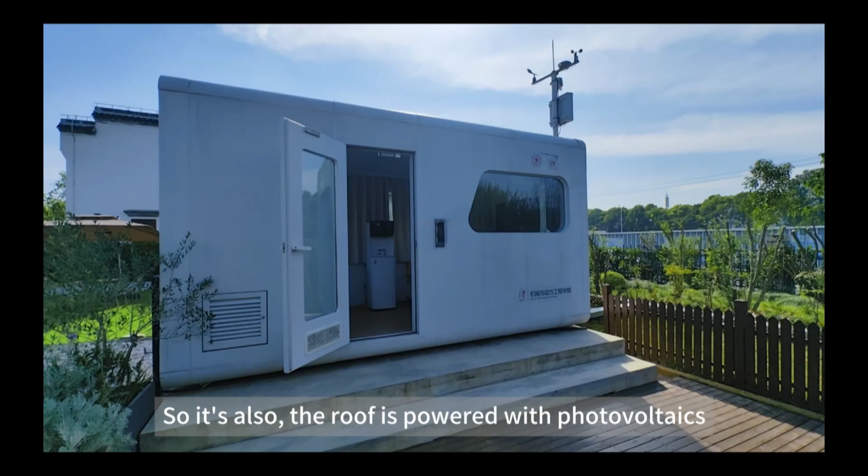Meanwhile, we have another demonstration of off-grid: this is a container box building, shown here. The roof is powered with photovoltaics, and we also have electric battery and air conditioning inside, with battery stored there for storage. And we have an atmospheric water harvester to produce fresh water from air. So this just shows how a container box could work with only photovoltaic and electrical battery systems.

So this is actually the second off-grid building. We had a third off-grid building, actually here, because we use photovoltaics with heat pump systems, but also have the battery inside. This is actually used for the rooms.

So with photovoltaic batteries, here we have the battery storage, about 10 kilowatt hours, used to support the whole building, a small building. We also use air conditioning, which I call a small temperature difference fan coil unit, driven by an air source heat pump heating system. So it can be used for winter heating, comfortable heating, and also summer cooling for air conditioning.

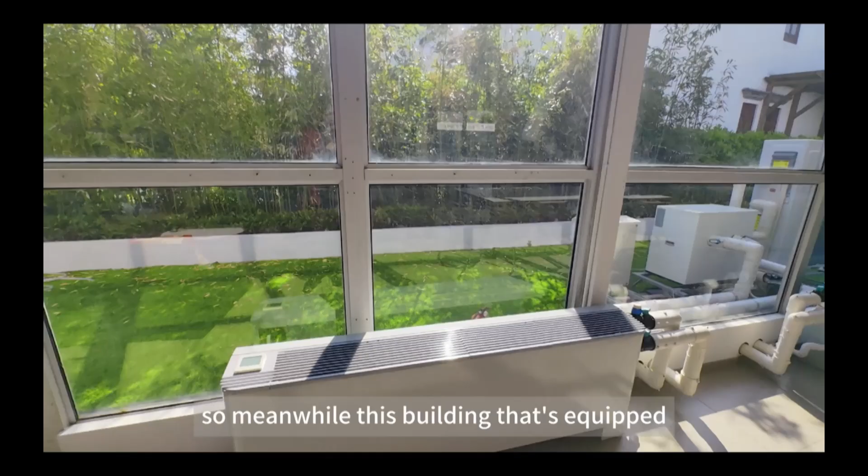Meanwhile, this building is equipped with a lot of facilities for clean drinking water. This is normal clean drinking water, where we have tap water, and you get purified water for drinking, and a coffee machine, and so on. But what's important here, I want to demonstrate this is actually not tap water.

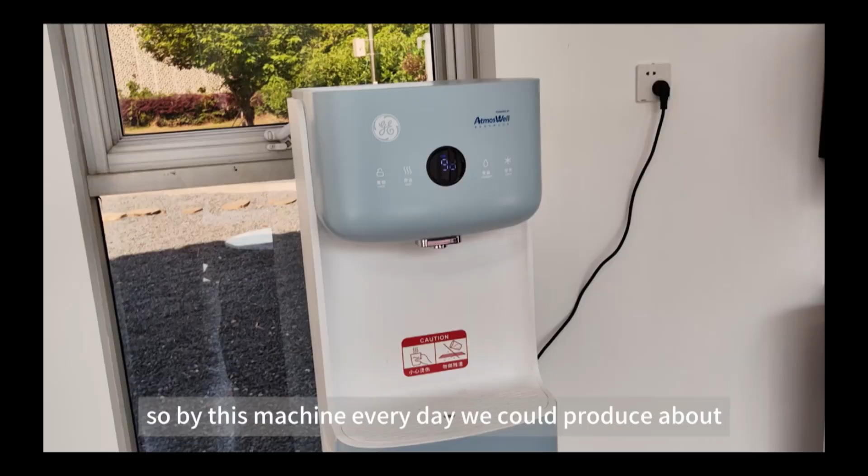So it's an atmospheric water harvester. With this machine, every day we could produce about 15 to 20 liters of water. We could use this anywhere - if we have an electricity supply, then you could produce water.

And here we also show a building outside. This outside building, we demonstrate, is actually a food nexus container box, also powered with photovoltaics. Inside we have plants just growing because we're using artificial lighting to simulate the sun. Here you could see what's inside - it's rotating machinery trying to get very good equivalent sunshine for the inside of the container box.

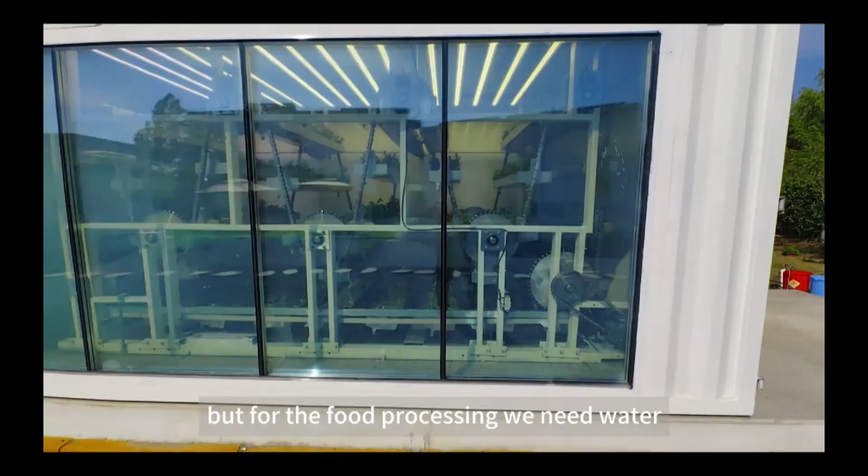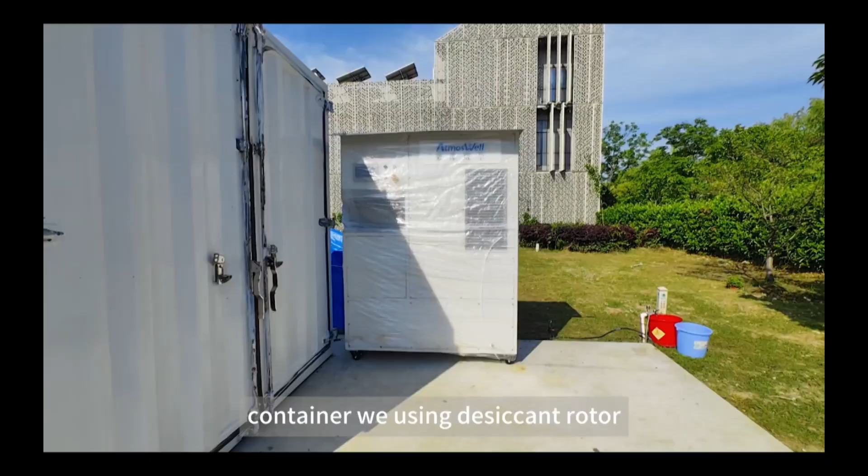So we use this for food processing, but for food processing we need water. So we also have this kind of system, called atmospheric water harvester, a container using a desiccant rotor. This water comes into the building, and inside the building we have another atmospheric water harvesting system using a condensing unit to recover moisture from the air.

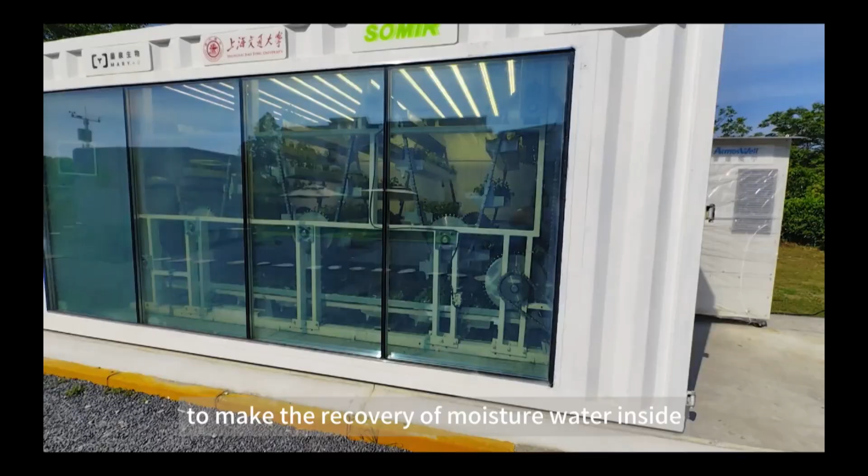So in this case, this forms a so-called innovative team for the energy, water, and food nexus. We use this as a demonstration, a small park, but we also have 4 independent off-grid buildings using photovoltaics and also batteries.

So in this case, we have the China-Italy Green Energy Laboratory, and also a small container box, and here is another container box for the food nexus. And also here, we're using this as a small conference room, also supplied off-grid with photovoltaics.

So actually we have 4 off-grid systems working together to show a zero energy park, or zero carbon park. So I hope this demonstration will be fruitful and achieve a lot, and we could get more applications of this kind of system.

So finally, I think... okay, so in this case, our team is growing. There are 4 faculty members, and some students, and now some students have become faculty members too. So year after year we are increasing in number, and we also see changes, with several young faculty members becoming selected national level talents.